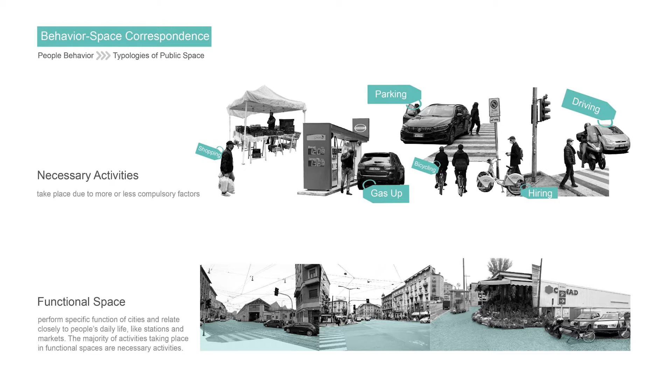Necessary activities include those that are more or less compulsory: going to school, shopping, or waiting for a bus, while functional spaces like stations and markets are where the majority of these activities take place.

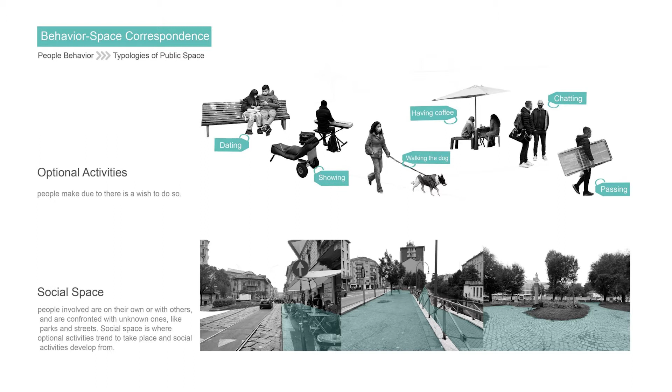Optional activities are participated in if there's a wish to do so and if time and place make it possible. In this case, social spaces can be described. People go to these spaces on their own or with others and are confronted with unknown ones.

Social activities include children at play, greetings, communal activities, and passive contact, which is simply seeing and hearing other people. In experiential spaces, by doing leisure activities in public spaces, people connect to a certain space as well as to the other people who use it.

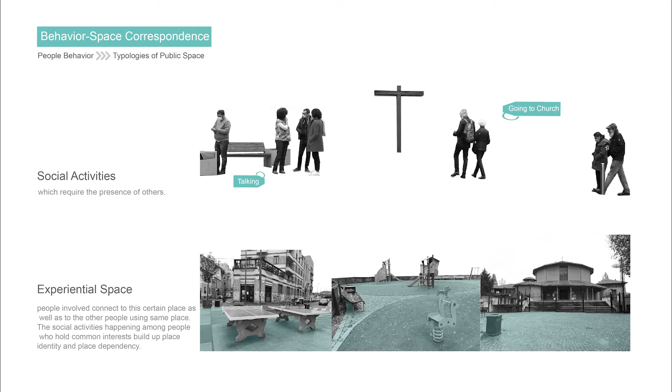Our research region is composed of several different cities. In our analysis, the central space of each region is the area which reflects the difference of public service, functions, and complexity. So we study each region from the PGT maps of land use, urban spatial structure, and urban activity summary, trying to form a map of central spaces of the research region.

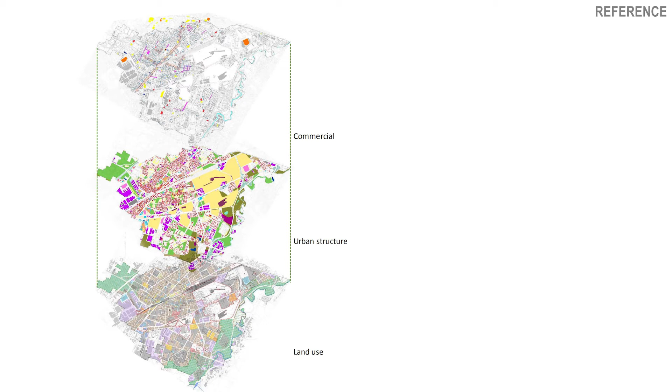For Sesto San Giovanni, we study from 3 aspects: commercial, urban structure, and land use. With information on commercial distribution, residential and public services, we identify 2 central spaces in Giovanni.

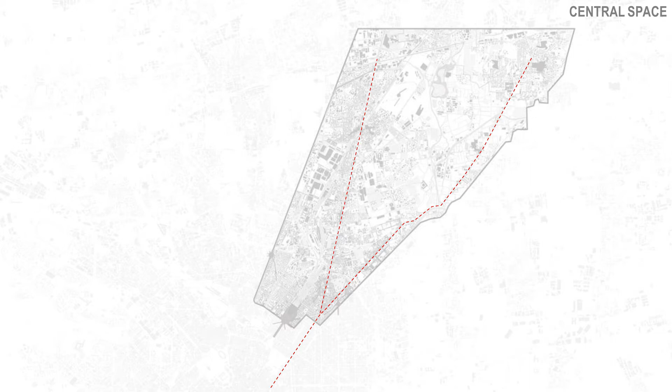For the other regions, we choose the same study method, studying from PGT maps of land use, public service, and activities. Thus, we form this map about the distribution of central spaces in our research region. Taking into account the axis extended from Milan and the metro line, we selected 4 typical places for more in-depth study.

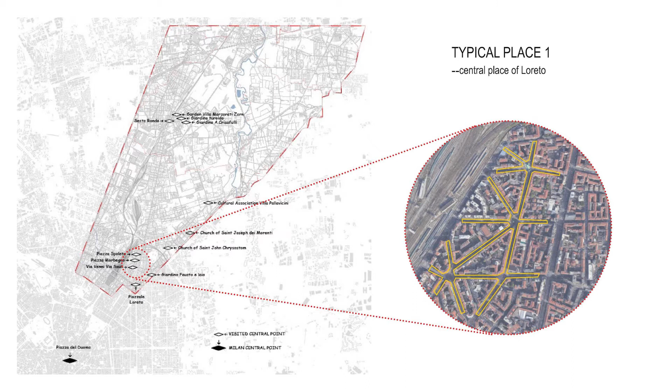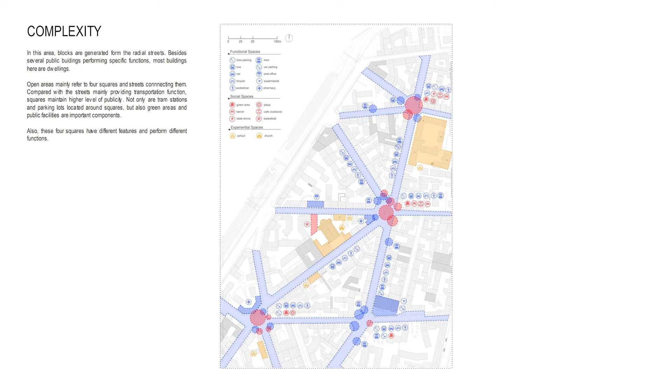The first typical place is a part of the central place of Loreto. Open areas here mainly refer to the four squares and streets connecting them. Compared to the streets, crossings provide much more public service, not only traffic stations and parking lots, but also green areas and outdoor facilities. The first one is Piazza Spoleto.

A middle high school is located at the corner. This plaza is surrounded by trees, benches, and sport facilities.

The second one is Piazza Morbegno. This square is featured by the central garden and complex traffic conditions. Also, the outdoor dining tables are very attractive.

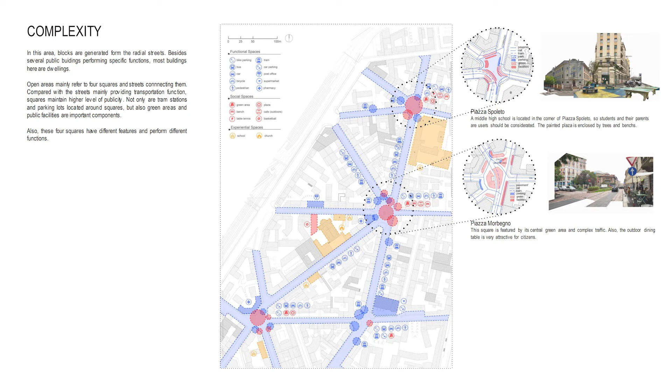The third one is a traffic intersection. There are many parking lots serving people who go to Conad for shopping. Social functions here are less performed than transportation.

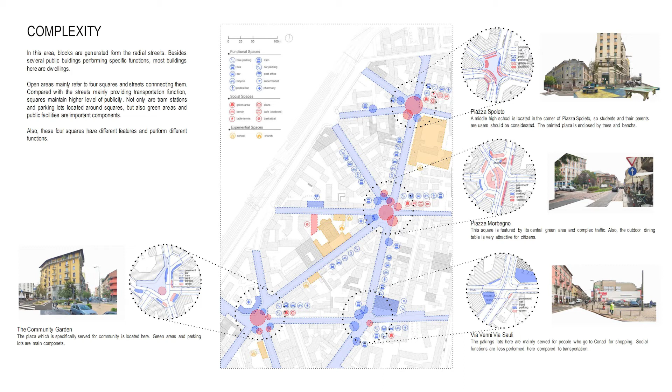The last one is a community garden. This plaza serves people who live here. Green areas and parking lots are the main components.

Then it comes to the vitality pattern. We could say this heat map kind of matches the complexity we mentioned before. The four crossings and parts of streets have higher vitality, especially the second square, Piazza Morbegno.

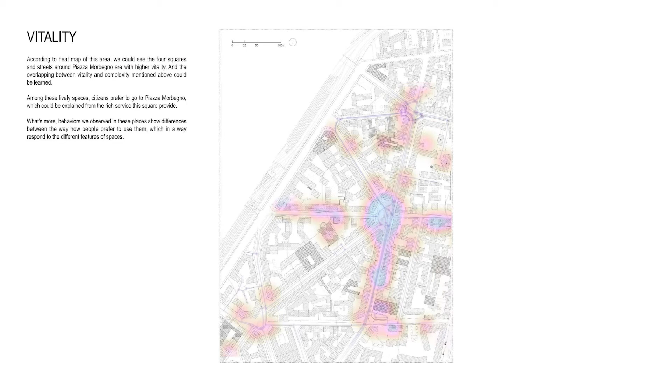Moreover, people's behaviors in different spaces show different features. For example, people would like to spend more time in the first and second plazas, making conversation or having lunch together.

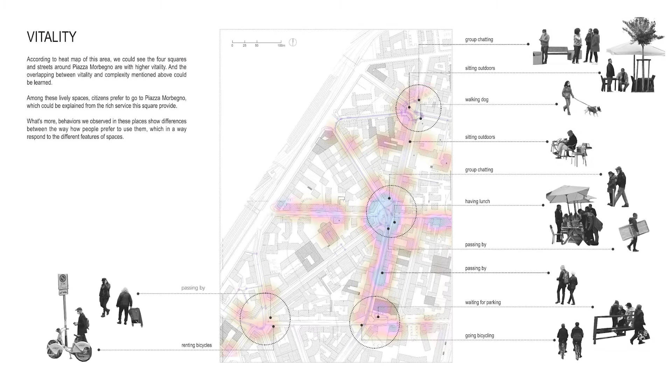The second typical place is one of the central places of Sesto San Giovanni. The main public space is made up of two squares and one street connecting them. The first one is a square where the subway station is located. It supplies citizens with small shops selling newspapers and flowers, trees and benches.

The other one is on a much smaller scale. It is surrounded by residential buildings and various shops. Plenty of greenery and benches are also provided.

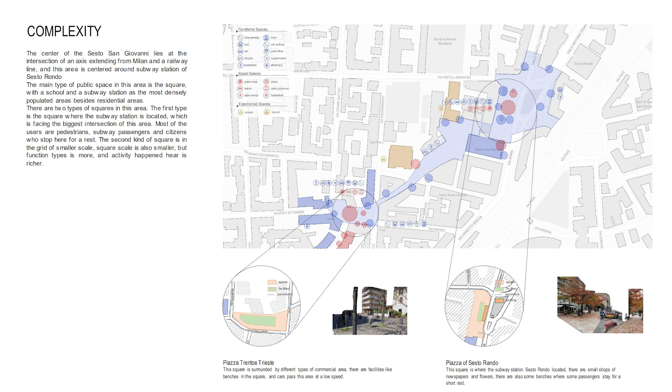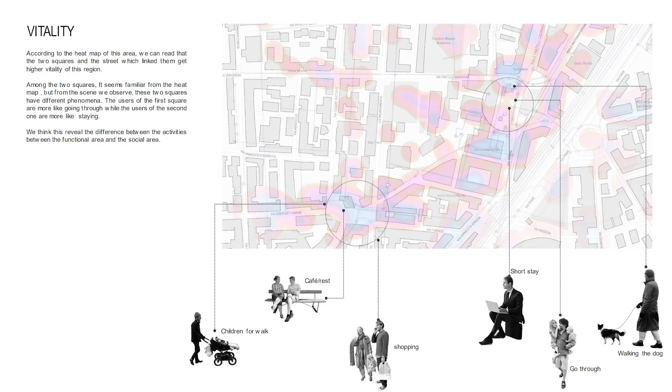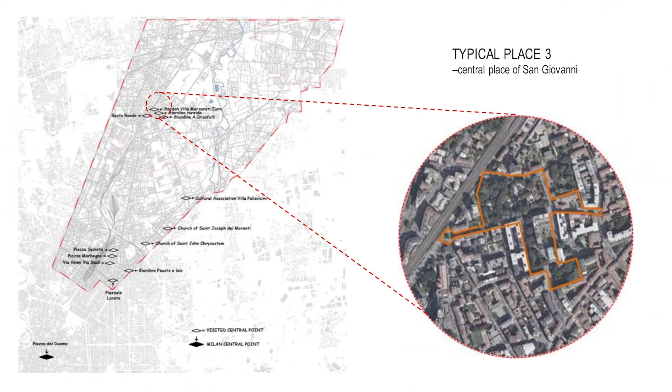Considering what we observed at the scene, users of the first square are mainly passengers from the subway and citizens who go through quickly, while the other square allows its users to do some shopping or have coffee, which makes them stay a long time. The third typical place is on the other side of the railway line.

This area is centered by the city hall of Sesto San Giovanni. There are two different scales of public green area: Central Park and Community Garden. There is also a square near the city hall, which is our first point.

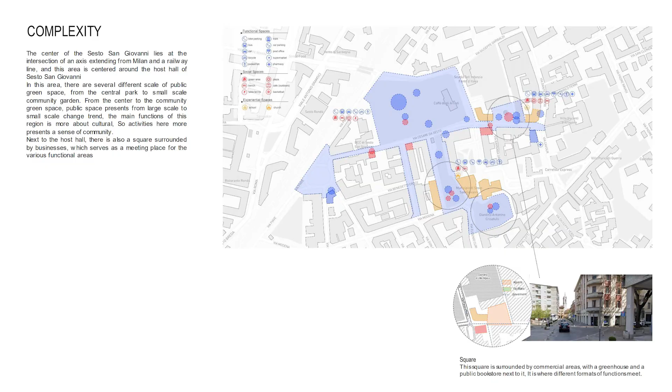It is surrounded by a commercial area, public library, and a greenhouse. The second one is a community garden with specific facilities for children, and the last one is a small community garden close to the residential area.

According to the heat map, squares, architecture with specific surfaces, and greenland with facilities seem to get higher vitality.

The central space of Brugherio is located in the northeast of the territory. Unlike the former ones, this space has been developing on the basis of historical nuclei, which also affect its fabric. There are mainly three active areas here, which are distinguished from others by the brick paving.

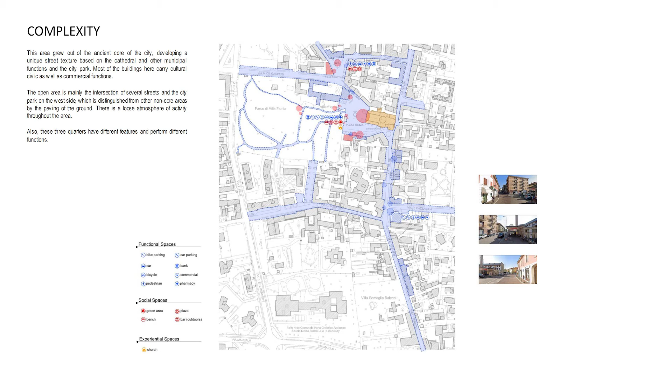First is a small plaza on the north side. We could see some red marks and blue marks referring to different types of spaces. The main traffic here is walking, cycling, and also driving.

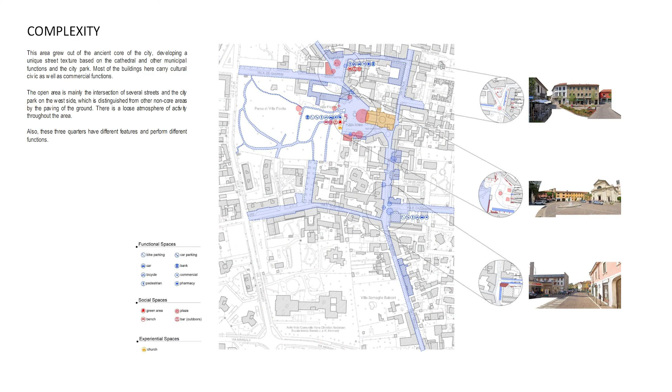Thirdly, it's more like an expansion of former open areas. There are only some functional spaces here. People would not stay here for too long.

With the activity map, there are some connections between complexity and vitality. Finally, we come to the conclusion part: for open areas among public space, the more complex functions it performs, the more vitality it has.